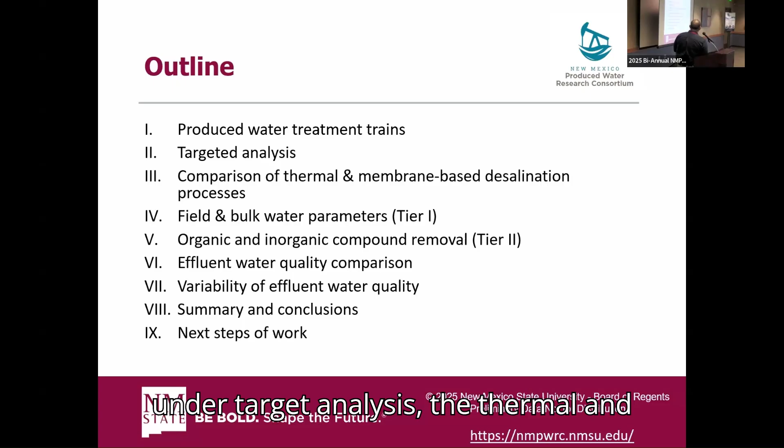With that said, today I'll be covering these topics in my presentation. Sorry. First, I'll briefly discuss the treatment train, or its major components, what will be covered under target analysis, and the thermal and membrane-based systems that we evaluated. These targeted analytes are divided into tier 1 and tier 2 components.

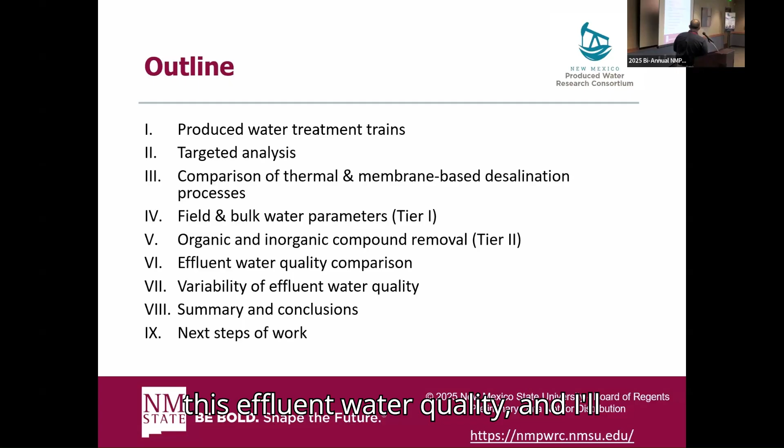We will go inside tier 1 and tier 2 and see what the removal percentages are and whether we see any anomalies. And we'll discuss the effluent water qualities and the variabilities we see in effluent water quality, and I'll anchor the presentation with a summary, conclusion, and next steps.

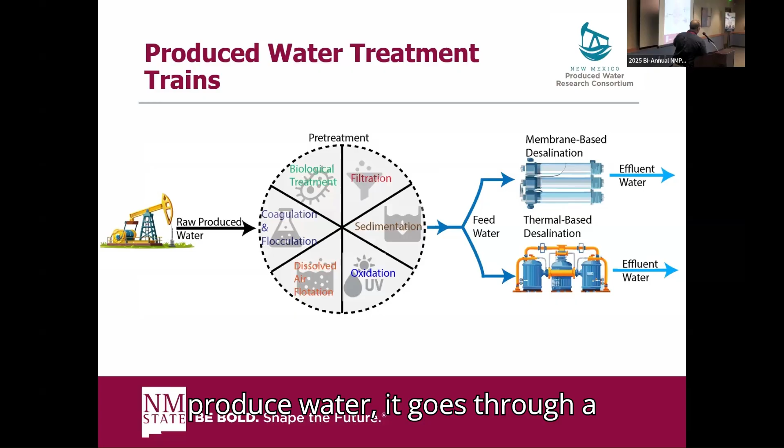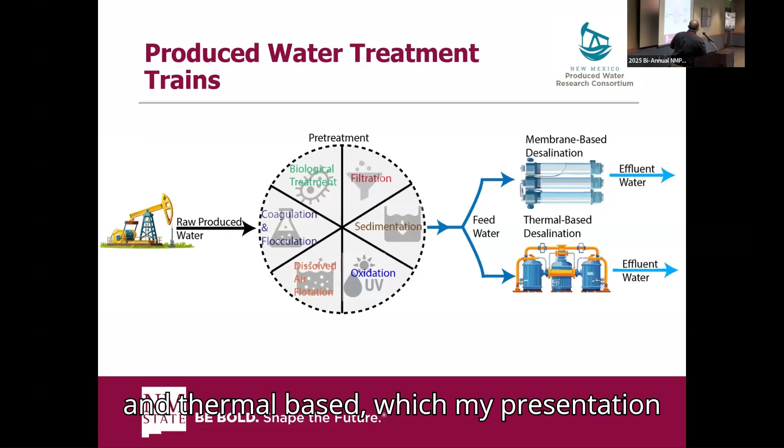So if we take a rough treatment train, we take the raw produced water, and it goes through a pre-treatment system. It can be biological, chemical, physical, or a combination of these treatments, and it feeds into the primary system. It can be membrane-based or thermal-based, which my presentation is mainly focused on. So I'll be discussing the feed and effluent water qualities of these primary treatment systems.

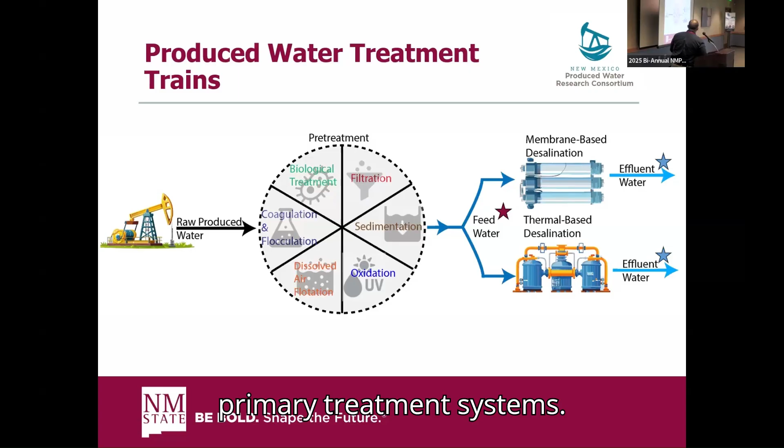For target analysis, we use the NPDES plus list, which is over 700 components, and the systems we are discussing today include 6 thermal systems and 4 membrane systems. Thermal systems start with the letter T and membrane systems start with M, the ABC nomenclature is based on the site, and 1, 2, 3 represents whether we sampled 1, 2, or 3 times. In thermal systems, we have an in-house system and a collaboration with Colorado School of Mines.

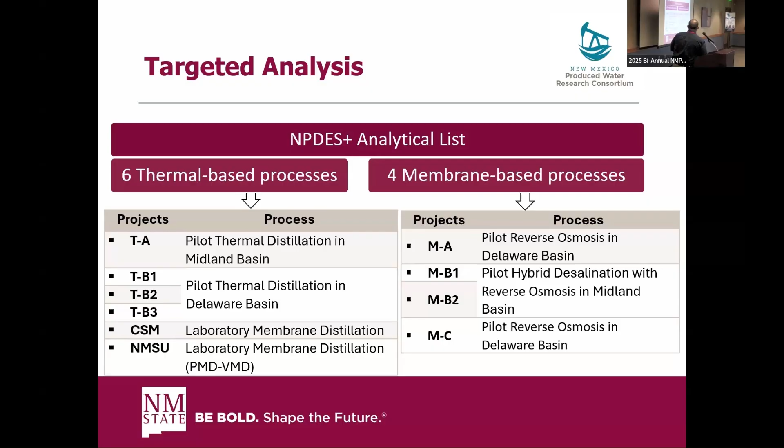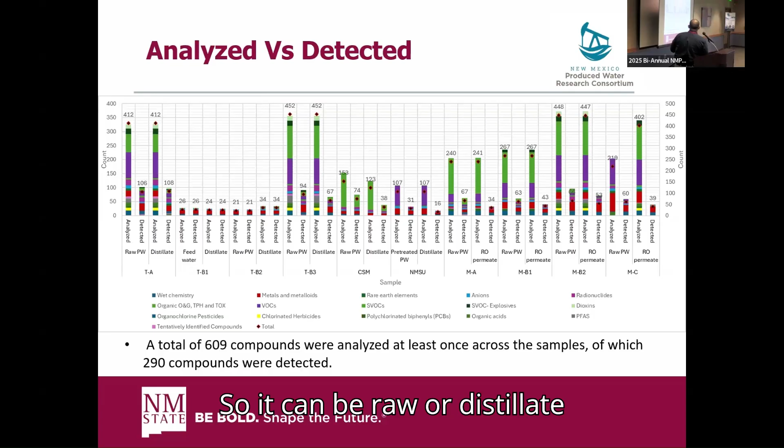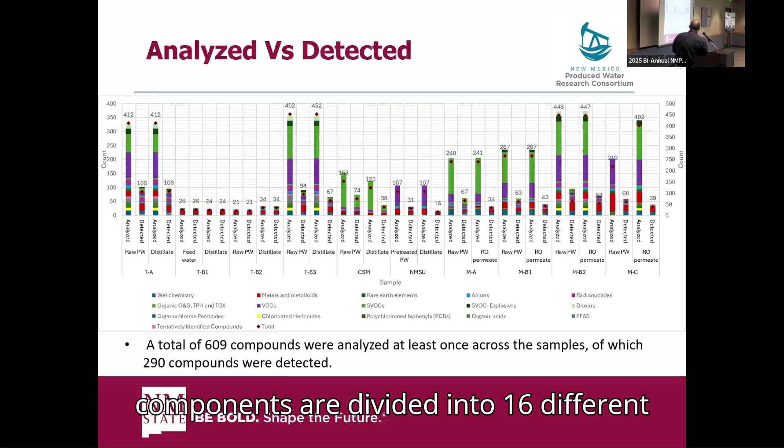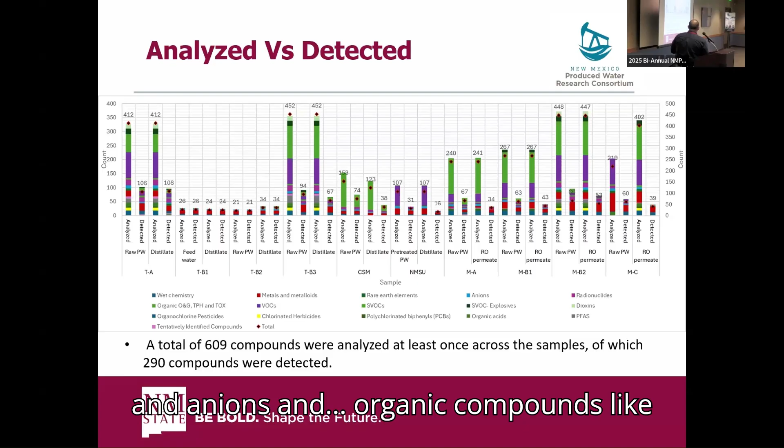So, as I mentioned, the NPDES plus list is over 700 components, and of these, 609 analytes were sampled at least once, and 290 were detected at least once, regardless of whether the stream was raw, distillate, feed, or RO permeate. We only detected 290 components out of over 700. These components are divided into 16 categories, such as metals and metalloids, anions, and organic compounds like SVOCs and VOCs, which I'll discuss in later slides.

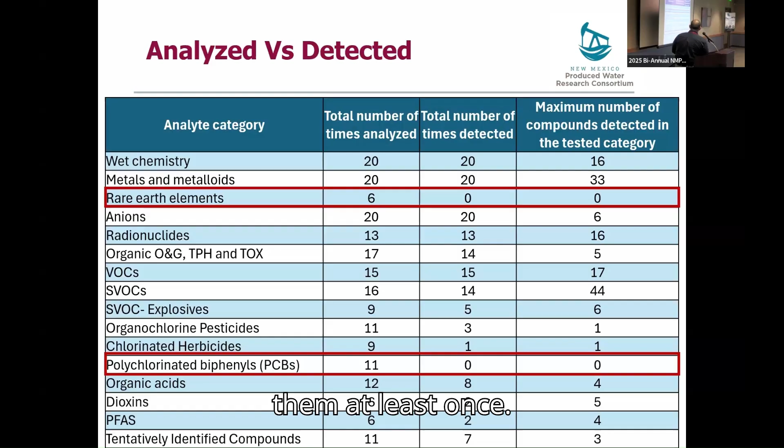With that, let's move on to the tier 1 category. So tier 1 category basically means data you can get pretty easily by measuring conductivity, pH, doing evaporation studies, likewise pretty hands-on on-site readings. So we have 21 tier 1 categories, but I have summarized a few of them just to illustrate the variation that you see in these feed waters.

For example, if you look at TDS, total dissolved solids, membrane-based feed varies from 75 grams per liter to 175 grams per liter. And the membrane is not second to the thermal system, where the variation goes from around 100 grams per liter to 175 grams per liter. So it's a huge variation.

So just to give a perspective on this, brackish water is 3 grams per liter. Brackish water concentrate or brine is about 12 to 17 grams per liter, and seawater is about 35 to 40 grams per liter. So you can basically fit all these inside the variation that you see here in the produced water. So as you can see, it's pretty challenging, it's pretty dynamic.

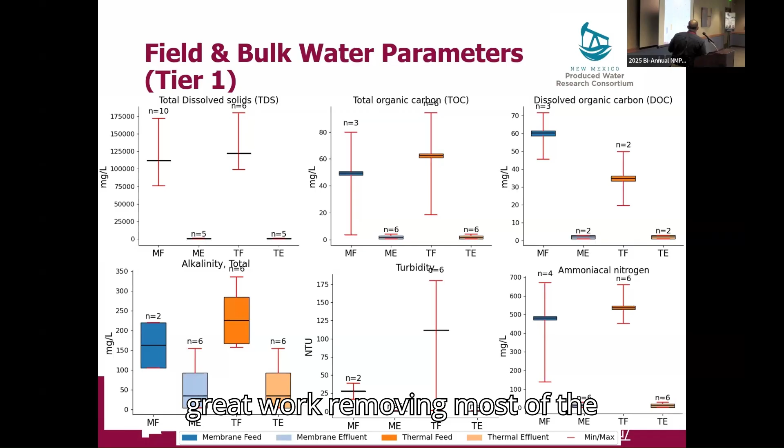The huge variation or the least removal percentage is observed in alkalinity, where the membrane base was around 85% and thermal base was about 89, close to 90%. Other than that, for the rest of the tier 1 categories, removal efficiency is close to 100%. Regardless of the highly challenging water, you can see these technologies have done great work removing most of the compounds as a whole. So let's move on to the tier 2 family, which will be digging into individual components.

For your reference, I have color-coded the bars. You can see that if it's dark green, that means the feed and effluent are above detection limit. And if it's light green, it's a membrane-based system where both feed and effluent are above detection limit. So there are incidents where we see the feed is above the detection limit, but the effluent is below detection limit. In such cases, I have color-coded them in yellow and orange for thermal and membrane-based systems respectively.

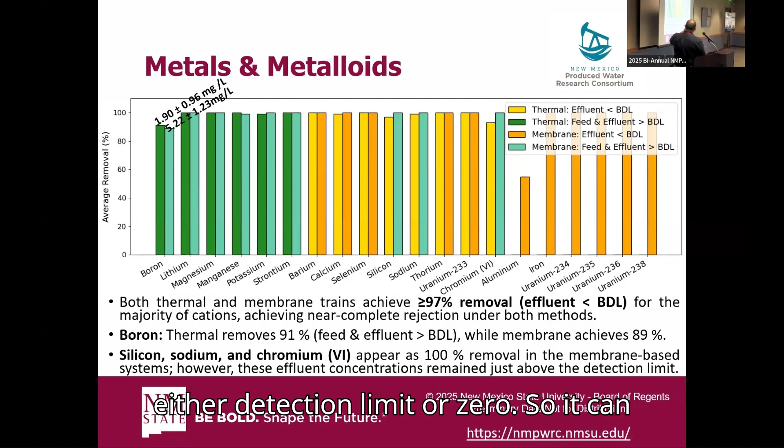And for the calculation, I took the detection limit as its concentration, because the concentration can be either the detection limit or zero. So it can vary between the detection limit and zero, but this is the maximum. The worst case scenario is plotted here. So as you can see, regardless of whether it's a membrane or thermal system, the removal as a whole is 97%. So even the boron removal is around 90% for both membrane and thermal systems.

The effluent concentration still contains a significant portion. In general, both vary around 2 to 5 milligrams per liter. We will discuss in later slides how this influences fit-for-purpose applications. The significant difference between the membrane and the thermal system comes from silicon, sodium and chromium 6, where you can see thermal systems push these compounds below detection limits, while in membrane-based systems we observe some of these compounds above detection limits.

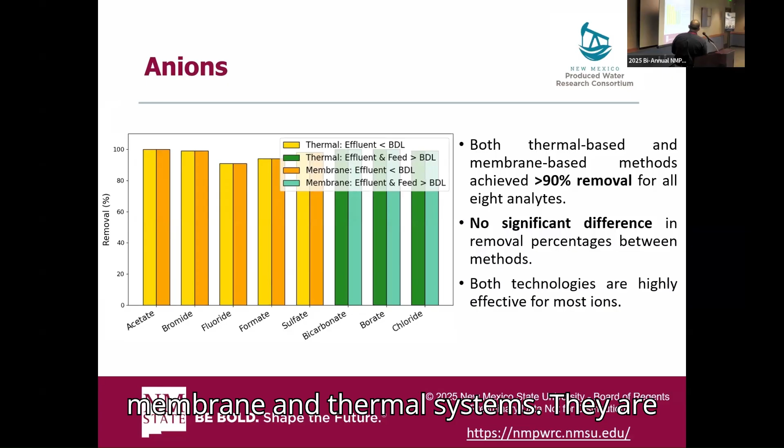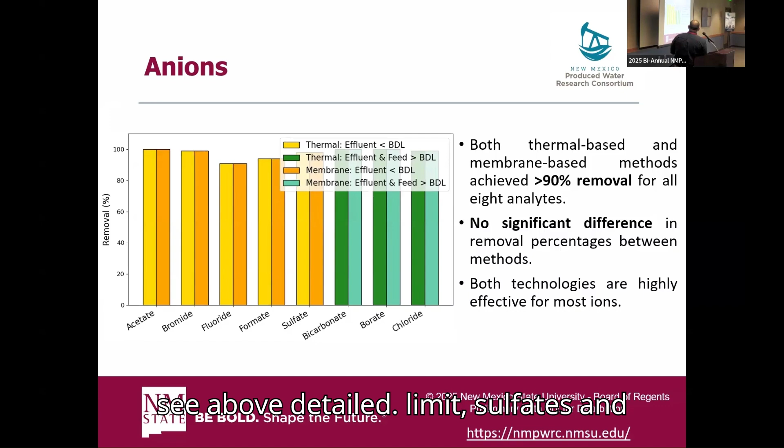When we move on to anions, there's no significant difference between the membrane and thermal systems, where both remove over 90%. Bicarbonates, borates, and chlorides are the common effluent anions we see above detection limit. Sulfates and the rest of the halides are below detection limit.

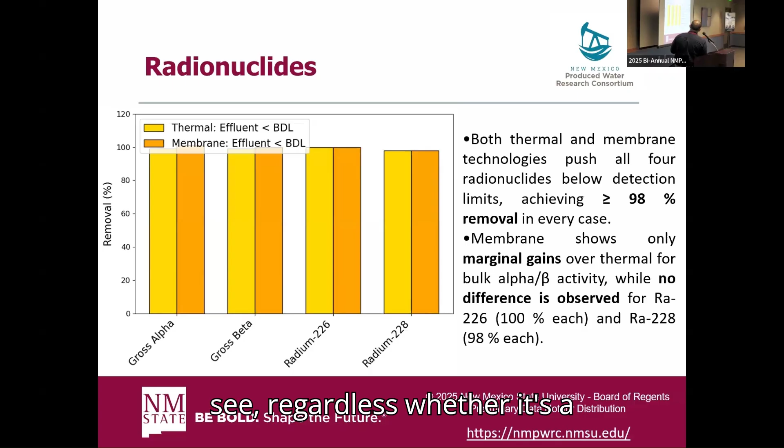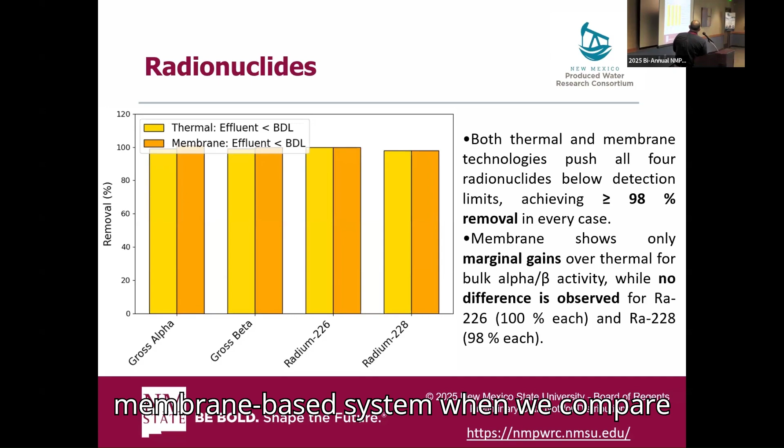Radionuclides are one of the challenging and more focused areas, where you can see, regardless of whether it's a thermal or membrane-based system, a removal over 98%, pushing the concentration below detection limit. There's a marginal difference in the membrane-based system when we compare gross alpha and gross beta, but it's just a marginal advantage, below 2% difference.

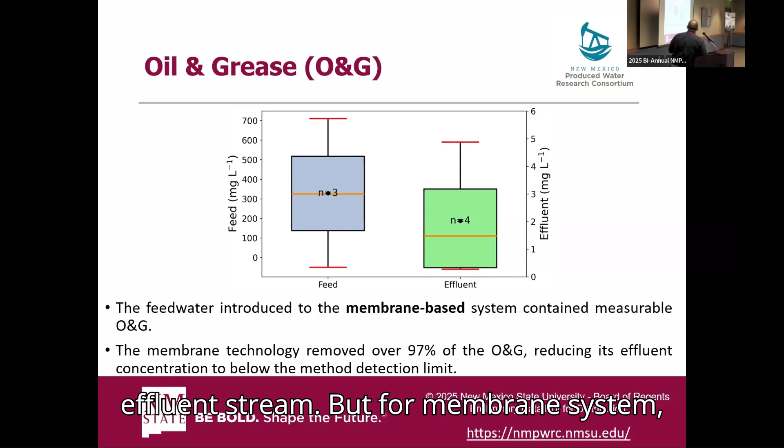From inorganics, let's move on to organics. Let me start with oil and grease. For thermal systems, we did not see any oil and grease in the feed stream, therefore we don't see it in the effluent stream. But for membrane systems, there are 3 studies that report feed streams containing oil and grease, and 4 for effluent. This can be due to adding lubricants or something related to that, but as you can see, it removes around 97% of these compounds.

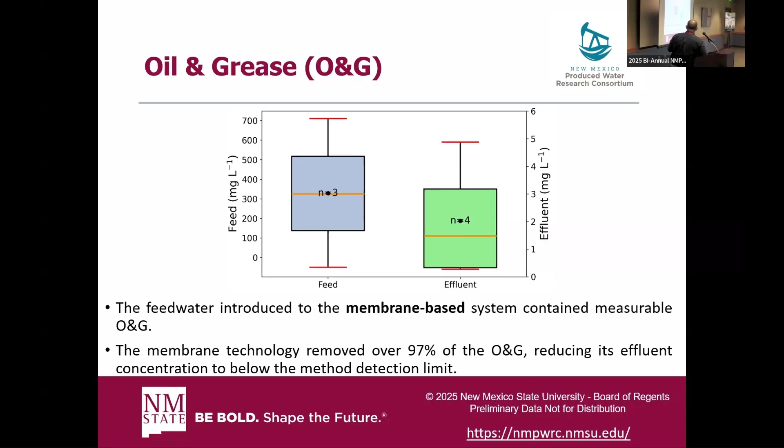The next family of organic compounds that I'll be discussing here is the volatile organic compounds. The family is pretty huge, and the removal efficiencies vary from around 18% to 99+%. And there are incidents where we see negative concentration. This is due to accumulation of these compounds in the effluent stream. So this actually doesn't mean it's really bad.

So I'm discussing this value here. As you can see, it's negative 1000+%, but it actually doesn't mean it's really bad, because the maximum concentration we observe is 1 milligram per liter. So it's a numerical factor that comes into play to show a huge negative impact. But if you debug the situation, you can see it's a pretty low number.

So as I mentioned, it varies from 18.5 for thermal systems to 99+%. But one of the key factors I need to highlight here: the ones highlighted in light red color, these compounds can be seen in the effluent water qualities as well. That means even after post-treatment. So we need toxicology analysis and further analysis on this, which will be discussed later today.

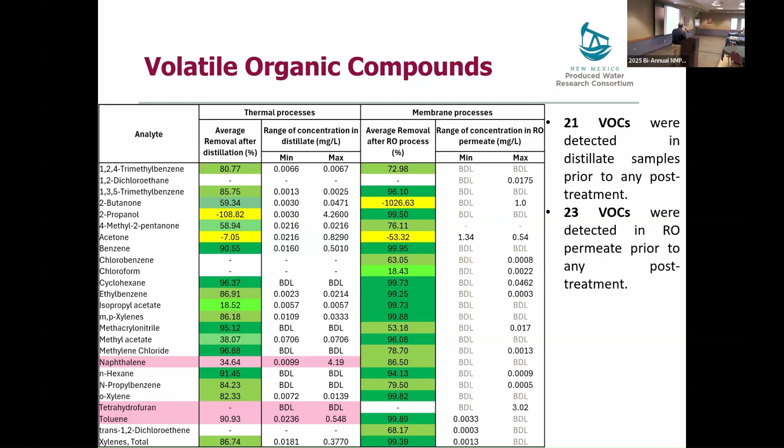So for clarity, these negative values mean they are concentrated in the distillate or the RO permeate stream. But regardless of that, we observe 21 different VOCs in thermal distillate and 23 VOCs in RO permeate streams. When we move on to SVOCs for thermal systems, as you can see, some of them are concentrated, and I think methanol is right here. So, as Dr. Shu was highlighting, some of these compounds prefer moving to the distillate through these systems. So we see 25 different SVOCs in the distillate prior to post-treatment.

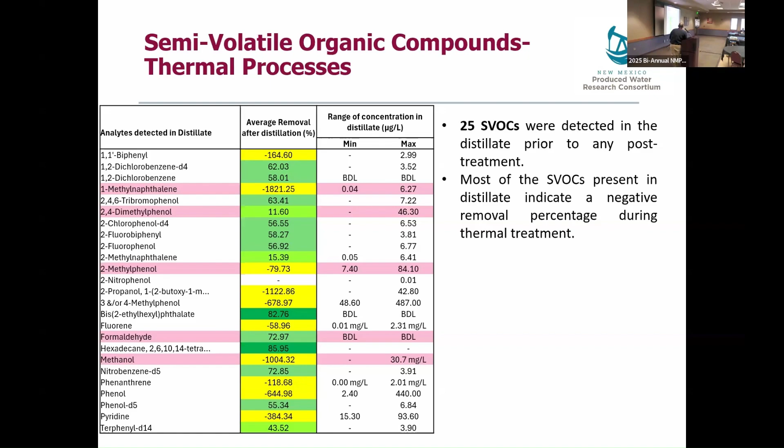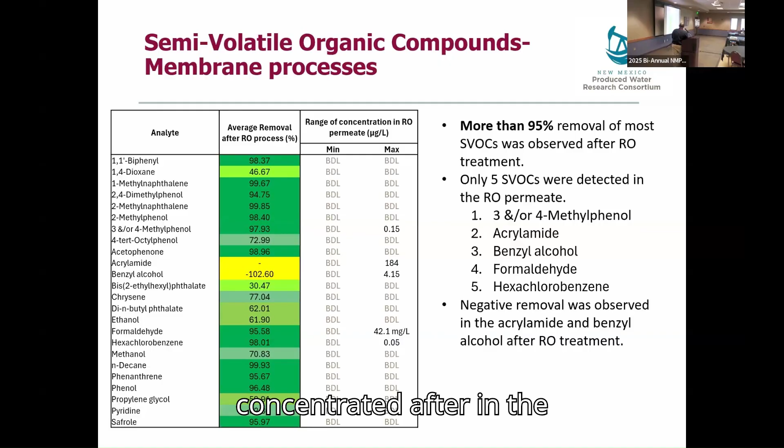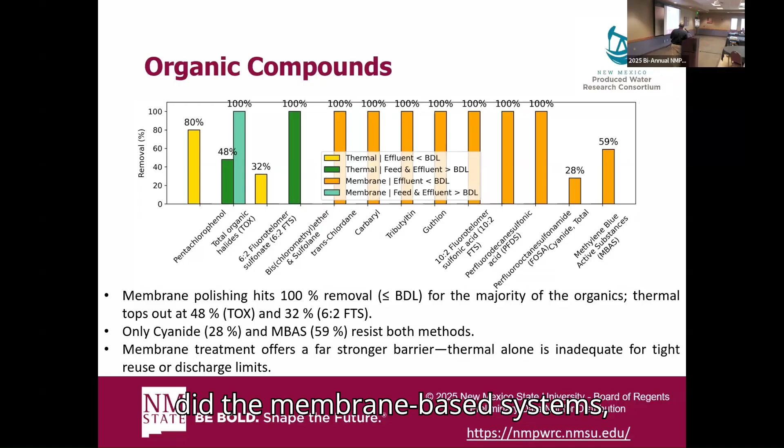When we compare the SVOCs for thermal versus membrane, the membrane system does a better job, where we only see 5 SVOCs here, but a similar story plays out where some of these compounds are concentrated in the RO permeate. There are other organic compounds we saw in the systems we analyzed. Here the membrane-based systems do a pretty good job of removing them. There are fluorotelomer sulfonates and total organic halides where we see the thermal-based system effluent above the detection limit and lower removal percentages.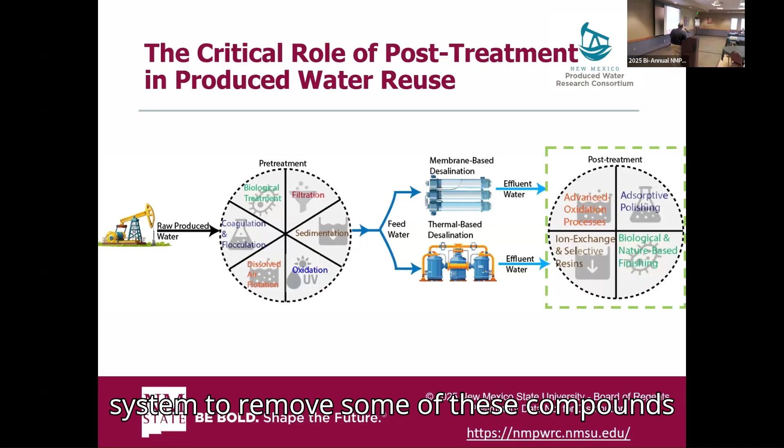So a robust pre-treatment should be there to generate the specific water quality for the primary treatment system, and an organized post-treatment system should be there, which is customized for the system to remove some of these compounds for the fit-for-purpose application. The reason I was highlighting that we need a robust pre-treatment system is due to the variation we see in some of the effluent water qualities.

So there was one study where we did sampling 5 times, and we see a significant variation. As you can see, the standard deviation is almost as high as the average. So the variation is significantly high. This can be due to the variation that we observe in the raw produced water. So if we have a robust pre-treatment system, we can feed the primary treatment system at static values for these compounds, which improves the removal percentage as well as the lifetime of these treatment systems.

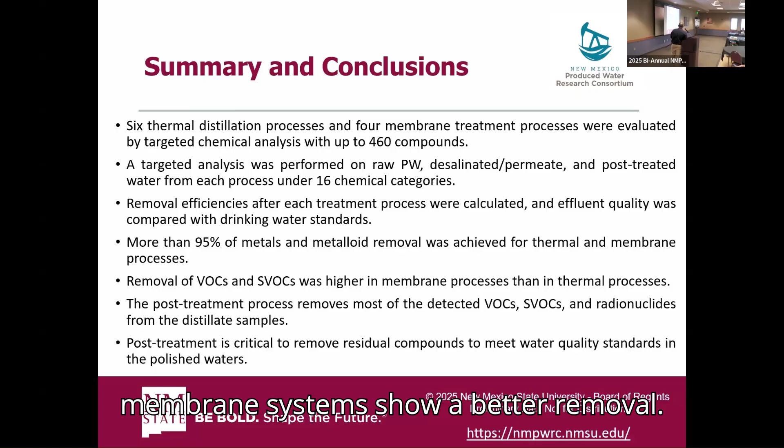With that, the conclusion and summary of my study is that we looked into 6 thermal systems and 4 membrane systems, studied up to 460 compounds, and we looked into the feed, effluent and post-treatment of these systems. In general, the removal percentage of the majority of these compounds is over 95%, and membrane systems show a better removal of some of the organic compounds over thermal systems. But regardless of whether it's a thermal system or a membrane-based system, post-treatment is a key component when we push this produced water for fit-for-purpose applications.

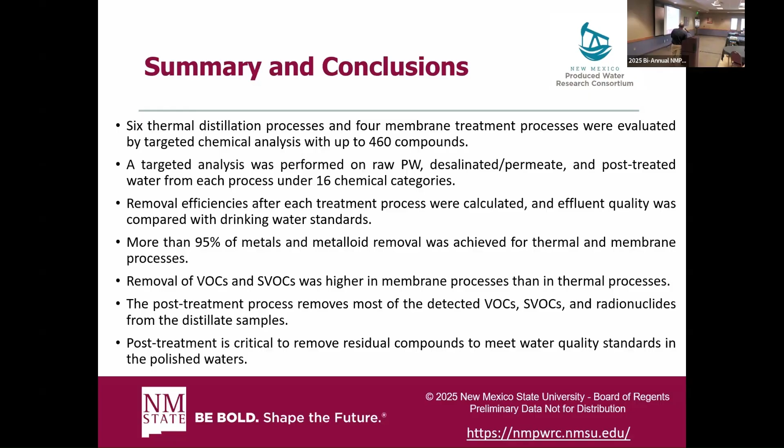For the next steps of this study, we will be further analyzing these results and try to incorporate more treatment train evaluation, which gives us a broader knowledge about the technologies. In the second part of the study, we will be looking into the physicochemical properties of these compounds and try to connect them with the removal mechanisms of the system. For example, melting point, boiling point, and molecular weight might play a critical role in removal percentages. So we'll be looking into that as well.

And we are trying to introduce a surrogate model. That means we are trying to see whether we can monitor TDS, conductivity, pH, or a combination of these variables and see whether there's a correlation with the compound concentrations. That way, we don't need to go through a rigorous monitoring process, especially when we push these technologies into pilot and full scales.

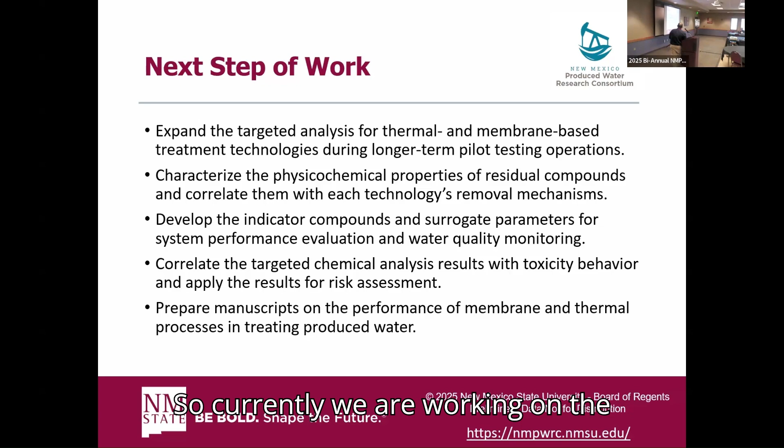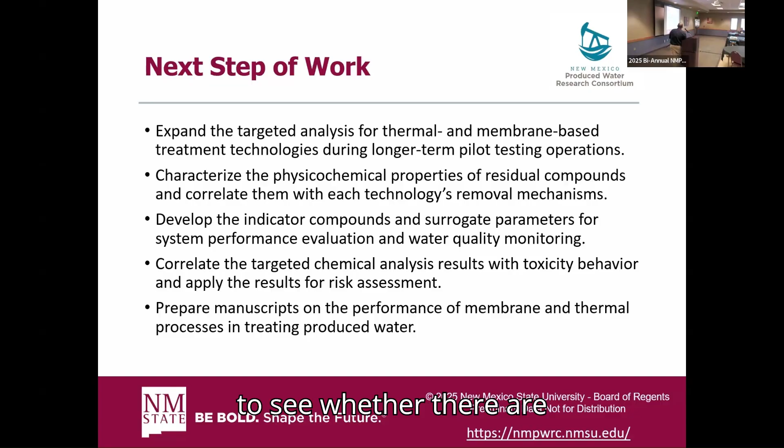Toxicology analysis is pretty important, and Dr. Chang and her group will discuss this in a later presentation today. Risk assessment is also a key component. We have initiated this study, and hopefully we can present it at a future event. And we are preparing 2 manuscripts at the moment for the thermal and membrane-based systems separately. Currently we are working on points 2 and 3, where we try to develop the surrogate model and see whether there is a correlation between physicochemical properties and removal mechanisms for these technologies.